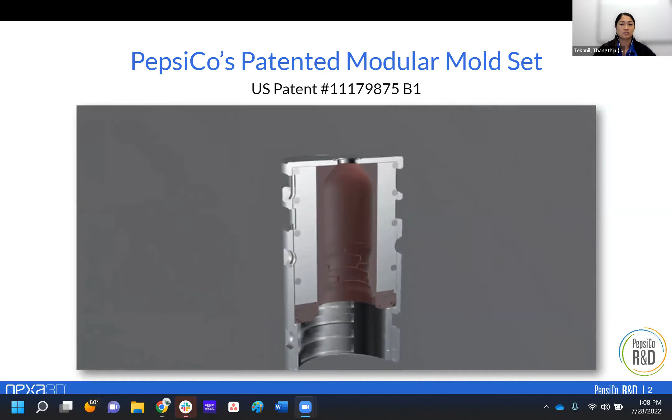And this design is also scalable to multi-serve bottle sizes in pilot plant environments. So after the 3D printed cavities are assembled, we use this filler material, which gives us that compressive strength required for blow molding, allowing this mold set to be essentially printer agnostic. And of course, the printer technology used will determine the number of cycles that this mold can withstand.

That is pretty incredible. So it might seem like a little bit of an obvious question, but why is speed important to the design process and everything that you're doing? How does technology really come into play for a global giant like PepsiCo?

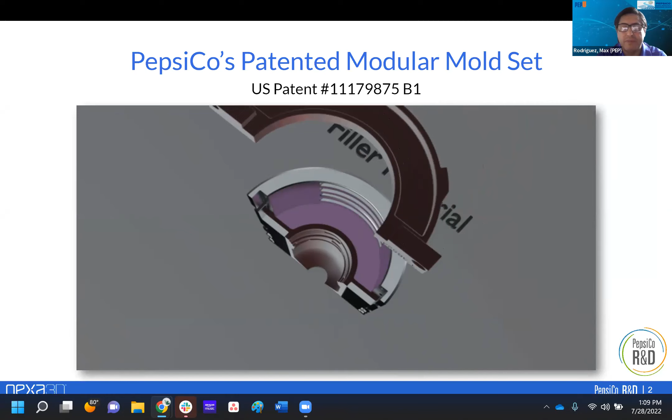I could take that question. So if we compare it to the past, the way that we did package development, normally we would be working with our industrial design team and looking at several concepts which emanate from consumer insights to a sketch, to ultimately CAD designs and multiple iterations. But you need to actually put it into the hands of our critical stakeholders before we go into manufacturing. And that can often take time, sometimes even months, with a development cycle leading into 12 to 18 months in our normal operations.

So anything that you can do to try to reduce that process by getting decisions earlier on, by getting the physical samples in the hands of those critical stakeholders, is a significant benefit, because it speeds our capability to get to market quicker and ultimately gives us a competitive edge.

You know what, it's just really cool. It might not be the most technical term for it, but it's really cool.

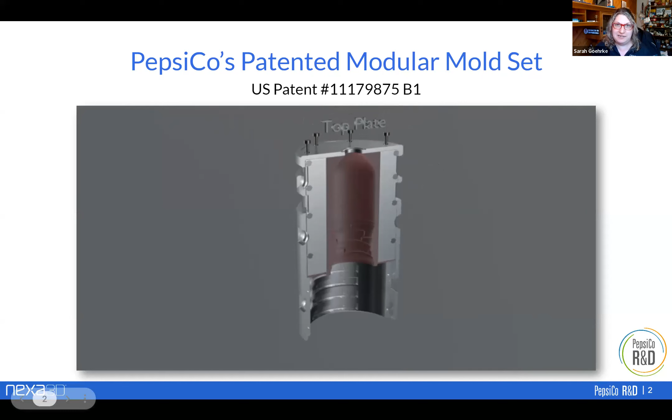So you developed a patented modular mold design system. Can we walk through a little bit what that looks like for PepsiCo and why it's important to companies like PepsiCo that might be doing things like relatively frequent product design? I'm going to scoot over here to the next bit of the workflow, and I'd love it if you would both be able to take us through this.

Yeah, so in terms of our workflow, we use a variety of interlacing technologies to really fast track that process to get us to a product by day 5.

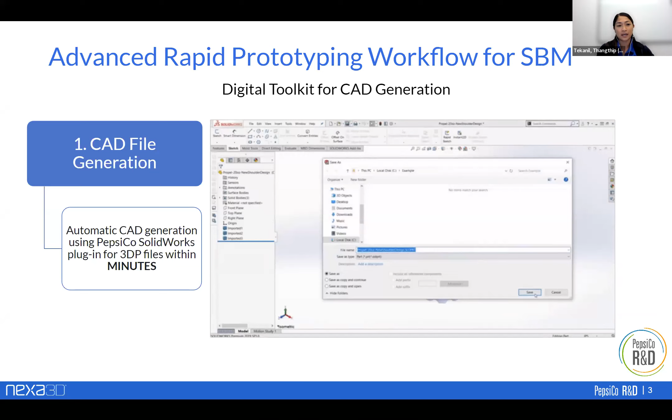So what we're looking at here is our CAD generation toolkit for automating the process of creating the 3D CAD models. This is a plugin within SolidWorks that we've designed and engineered to be user friendly, so that anyone with minimal SolidWorks expertise can run this plugin in a matter of minutes. We've shifted from manually creating CAD models and prepping them for printing to fully automating that process for generating the CAD models for printing.

If we move into the next bit of the workflow, we see something pretty interesting here. In parallel, to meet that 5-day timeline, we also utilize simulation software, in this case stretch blow molding simulations, to conduct hundreds of cases of DOEs for varying process conditions. By day 3, we're able to get a baseline recipe ready for blow molding, and in the meantime the parts are printed and assembled into the mold kit.

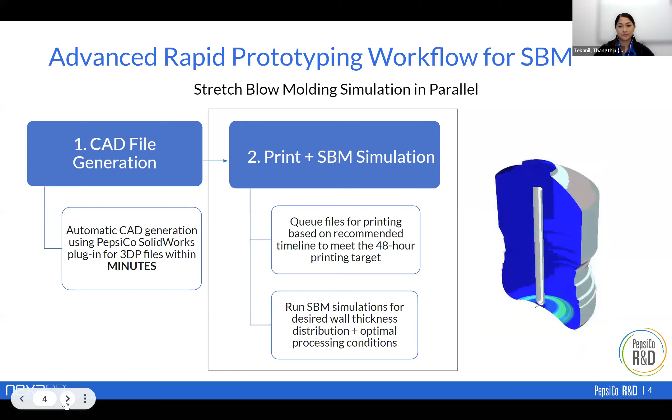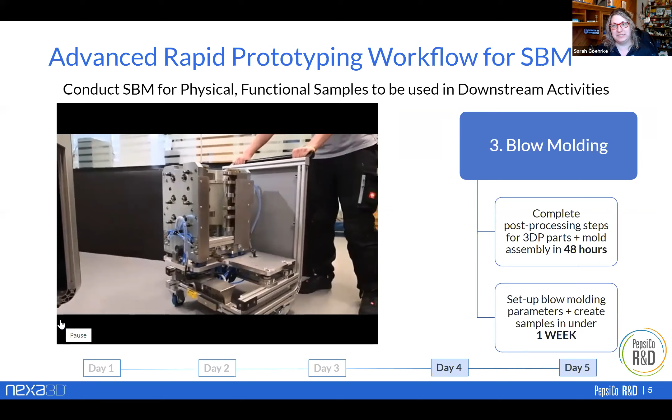Moving forward, we see even more of the workflow going on here. I'm going to take a minute to highlight this video that you at PepsiCo have shared with us about what the entire process looks like. Would you be able to walk us through this a little bit? What are we seeing?

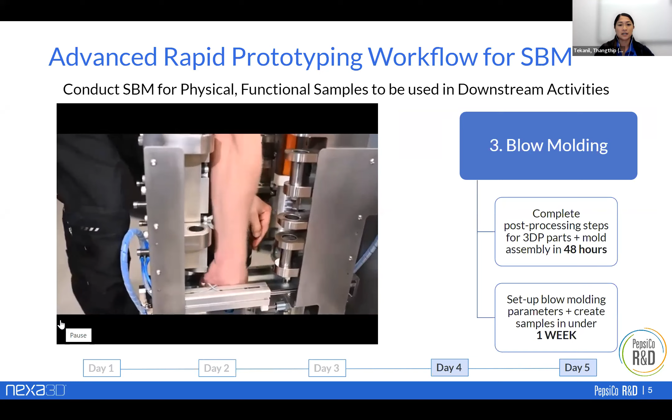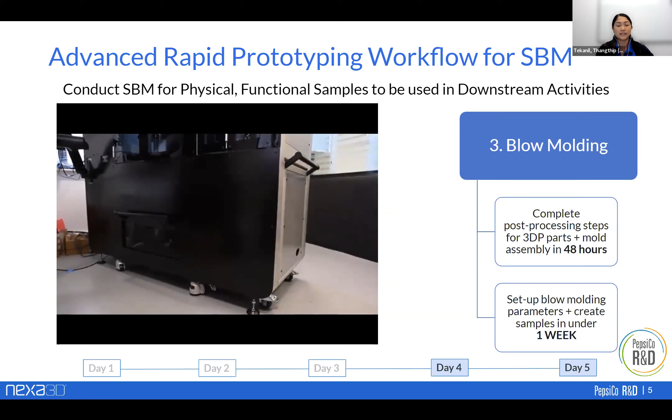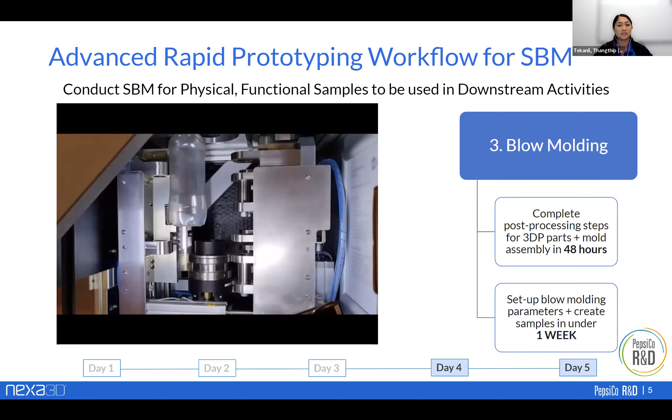This video showcases our toolkit that was designed in development with our business partner BMT, and it mates perfectly with our modular mold set as well as conventional metal molds. As you can see, the assembly and disassembly of the mold is fairly straightforward. By day 3 and 4, we have a fully assembled mold set with a baseline recipe to start with, and then we get into blow molding the actual bottles. These are fully functional samples, so we're able to fill, cap, and then use these for physical testing as well as downstream activities such as line convey, vend testing, things like that.

Awesome. We'll pause there for a second because I know that PepsiCo patented this process. It's a really cool process that you developed in-house to solve all of the problems and challenges you were seeing, and how to really break into that area of new product design for such a busy global company. We know everything you've done has been in your best interest, and you had to evaluate a lot of technologies to get where you landed today. Can you tell us a little bit about what that process was like? And I'd love to hear from Dynamism, from Hratch, what the process looked like from your perspective. As you worked with PepsiCo, how did that relationship develop and evolve and bring us to where we are today in evaluating and validating designs?

Yes, Pepsi had reached out to us early in 2021, at the beginning of the year. They presented us with some of the challenges they were experiencing during that time. Obviously, the biggest criteria was the material need, as well as the build platform and print speed. It was pretty easy to narrow down the option and go directly to Nexa, where we were able to provide the largest build platform in the resin industry, as well as bringing in the Loctite XPEEK material to complete the whole package. Working with Thangthip was a pleasure - they were able to share some of their STL files. Our applications team was able to utilize the equipment we have in-house to print several different iterations of the product, and then we shipped it off to them for testing, and the rest is pretty much history.

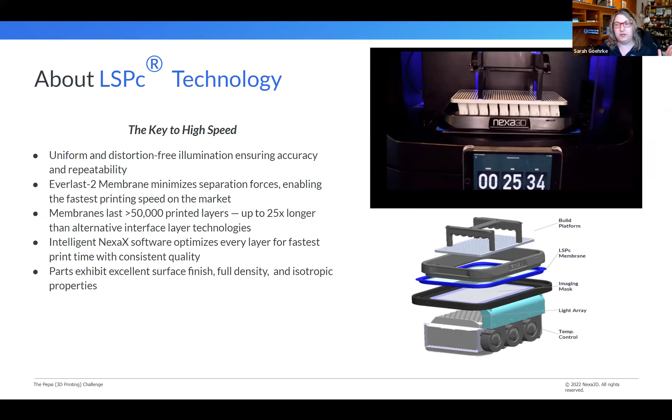But the actual throughput is this full end-to-end process, and that's where we really need to focus. End-to-end means identify, evaluate, prepare, produce, wash, and cure. We can't ignore any step throughout this process. There's really a very lengthy process that informs everything that additive manufacturing is today. And it's that end-to-end process. You need these different factors when you actually look into that math.

And if you check out nexa3d.com really soon, you'll see our 20x productivity white paper, because it's about time. That's what we really offer you. That 20x comes in through the math worked out from print speed, build volume, the wash time, the cure time, and then getting your actual finished part off the line.

And so when we look at everything that was able to happen to come together here for PepsiCo, what came into play was that larger build volume, having that industrial capability with an ultra fast print speed, with that end-to-end wash and cure everything mode coming in. Hratch, you and your team at Dynamism were really able to exemplify what that could bring to the team at PepsiCo.

And we really value the thoroughness of evaluation that you were able to bring to the table, because we want you to look at your options. We want you to see what else is out there. This gorgeous blow molding application that the PepsiCo team designed and patented is very, very intentionally agnostic. It doesn't rely on a single print technology. It doesn't rely on a single platform, a single material, but it's finding what works best for what you're doing. And so that really resonates with what we're doing, because what we want to do and what we want to offer you, and to anyone who approaches our technology, who approaches our platform, is to get the speed of a full end-to-end solution and that actual throughput, that actual realization of success and what that means to you.

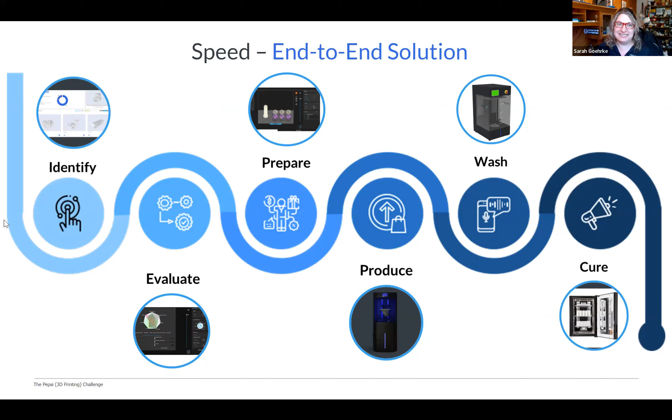I'll leave it to you if you want to talk about a little bit of the materials and processes that you worked with. But one thing that's really special about what we're talking about today is the entire platform that you were able to bring together, and what Hratch and his team at Dynamism were able to bring in. And that includes our materials partner at Henkel Loctite.

So Sam, the material in question today for this particular application is XPEEK147. What is it? What does that mean? Sure, so XPEEK147 is essentially our high HDT resin.

As you see on the slide here, we publish an HDT of 238C, and just to let everybody know, through some additional ASTM testing, we're actually now recertifying up to 290C. So really in the industry, what makes this product quite unique is it's one of the highest HDT one-component materials. There's no mixing, you use the product just as a one-component material. You'll see it has good tensile strength, Young's modulus, a low elongation. And what really makes it kind of unique is also it has a low water absorption and good low coefficient of expansion.

So we've seen a lot of success in these types of molding applications. And through the work we've done with Nexa, really optimizing a workflow, we're able to guarantee that a customer can achieve these results, with wonderful print definition. My assumption is something that the Pepsi team really liked is that through their design iterations, they're getting really good definition of detail, which comes from the uniqueness of the printer and the way our two teams, Nexa and Henkel, have worked together to optimize the process.

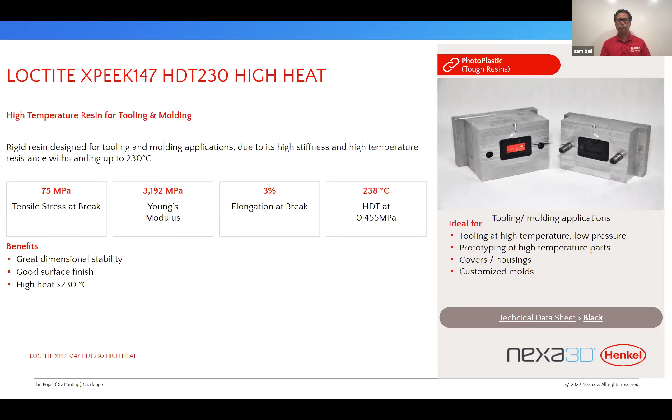So this is an application for actually a Henkel material that we use for injecting a polyamide material. We call it Technomelt, where you overmold electronics, and same thing, we've printed the mold set. So I think that's really what makes this product unique, and my assumption why it was selected by Dynamism and Pepsi for the application.

I love that. Sam, if I could just pick your brain for a minute here on that while I have you. XPEEK147 is a really interesting material. Can we go a little bit into its genesis, the material itself? Why was it brought to market? Was it applications like this? Did you kind of see in your crystal ball that companies like PepsiCo would be needing a high heat mold material? What was it about XPEEK147 that really made this material evolve, come to market, and become relevant for platforms like ours at Nexa 3D?

Sure. Well, I think the genesis of the material is as we were launching different materials, we look across the spectrum of what are those spaces that industrial customers are looking to fill. I think as we all know, people sort of revert back to materials like ABS, traditional plastics, and those unique properties. I think in this case, it's interesting that Nexa has sort of aligned this to PEEK, a polyether ether ketone, where you obviously have a product that has low moisture absorption.

And really the genesis was to develop a high HDT material. As we see, there's lots of applications in automotive, under the hood, things where there's a lot of thermal cycling, yet you need to have really good dimensional stability at temperature or through a thermal cycling process. And so that's really the genesis of this material.

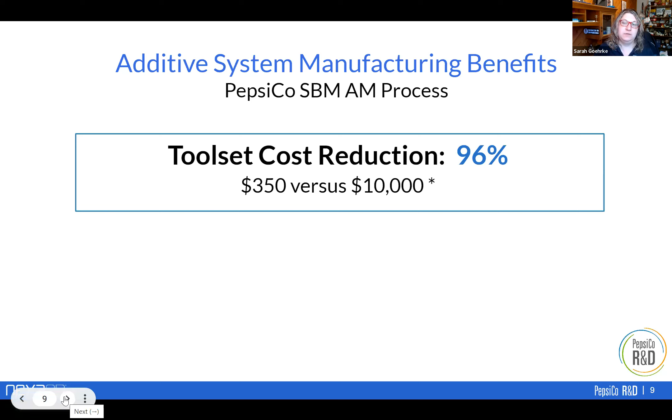And we have another compelling percentage point for you, which is a 93% time reduction. Can you speak a little bit to what that means?

Yes, sure. So for us, we go to outside service providers, typically to manufacture our mold set. From the time we're ready to proceed forward to the time we actually get the molds, it could take about 4 weeks. In comparison, our entire process of 3D printing and assembling the mold is within 48 hours. That's where we've demonstrated a 93% time reduction.

Okay, so Max, when we're talking about that 48 hours, what exactly is included in that? That used to take 4 weeks because there's a lot in there, right?

Yes, absolutely. So it's our internal process of being able to get our files approved and released to our service provider, our internal process of issuing a PO, their process of getting the metal stock and reserving time in their subtractive manufacturing process, and the finishing step—polishing—all of that takes quite a bit of time. You could reduce that if you look at the administrative tasks, but even with that reduction, you cannot meet the internal process of 3D printing.

So a lot of times when we talk about how 3D printing plays well—what is it they say on report cards? Plays nicely with other kids. When we talk about how 3D printing fits into that kind of report card, a lot of times people want to say that 3D printing is replacing traditional manufacturing, replacing blow molding, injection molding, name a manufacturing technology, right?

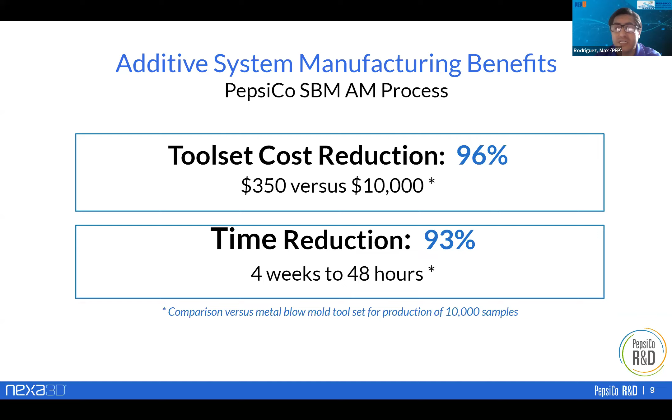You have to look at the way we've constructed a mold set and how light the parts are that we print. We're printing 2 shells and a base, so we're not utilizing a significant amount of PEEK material during the printing process. If we were printing the entire mold, I'd say you'd start to get into significant material costs, but we're only printing what we need—a very slim shell. Then we're filling the void between the metal outer casing and the 3D printed shell with a very low-cost dental stone material—think of it like plaster, but very low cost. So we're minimizing the PEEK material used and filling it with very low-cost material to keep the costs within that $350 range we quoted.

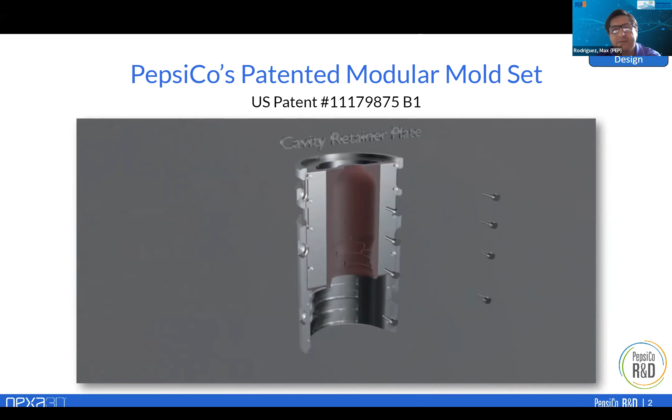Another one that fits right in here, Max and Thangthip: how often are you producing new molds and designs?

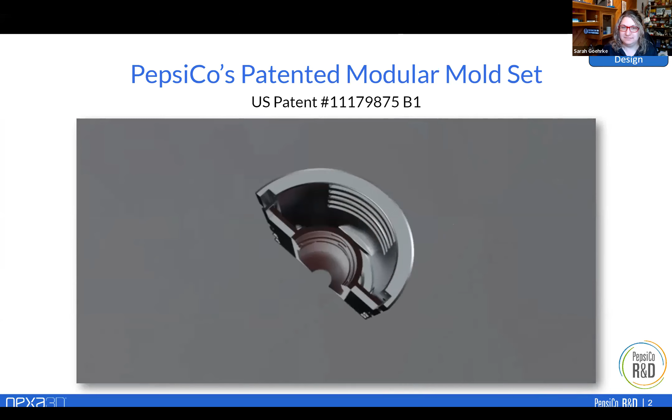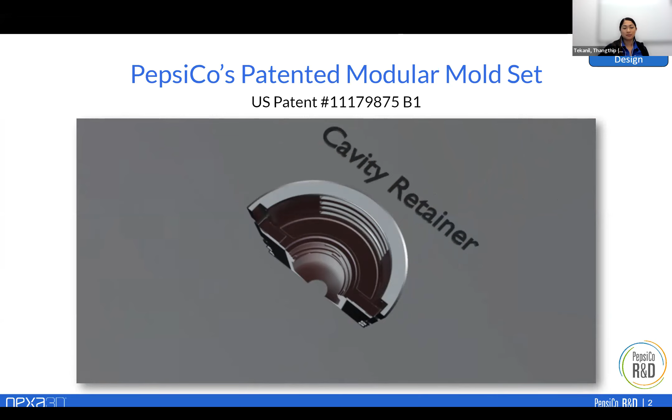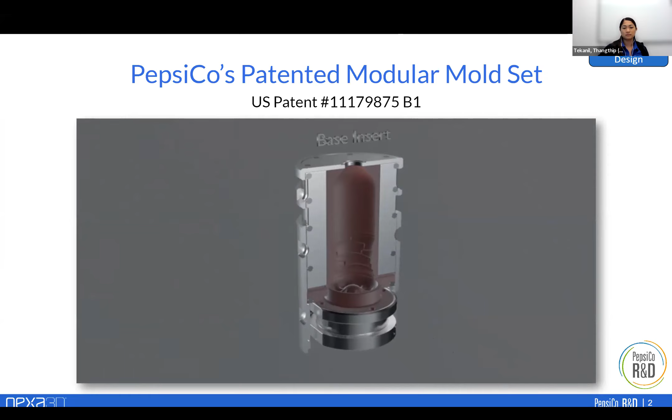I'll let Thangthip answer this because it's been nonstop, but she's got the numbers. Yeah, it's pretty much been nonstop ever since we got our lab scale blow molder in February. Since then, we've been able to do 8 bottles now, which is unheard of with our conventional methods of producing molds. That's substantial, especially for a company like PepsiCo that has so many brands and designs requiring so many different bottles, and keeping up with the times is its own thing. For such a busy global company, having all these designs available to do and redo, and brands to do and redo, and being able to do 8 at a time, that's notable.

That's notable. So we'll dig back in here for some more questions. Got one coming in: what is the biggest takeaway or learning from Pepsi that you would share with other companies looking to use a hybrid AM and subtractive or molding approach for developing tooling?

We take lessons and learnings from different industries. For example, in the injection molding industry, MUD tooling is widely used, where you utilize inserts to generate the part. The use of PEEK material is something that's been used in automotive. And even there, we're expanding our capability by looking at increasing the mechanical properties through mechanical electroplating, mechanical coating. So we look at a host of different industries to try to get inspiration and look at what else we can exploit. We rely on industry experts, the ones with a keen eye and a keen pulse of what's happening, like Dynamism, to fill us in on stuff we may not see because we're end users, not doing this on a day-to-day basis. But we try to take as many inspirations as possible from other more experienced players.